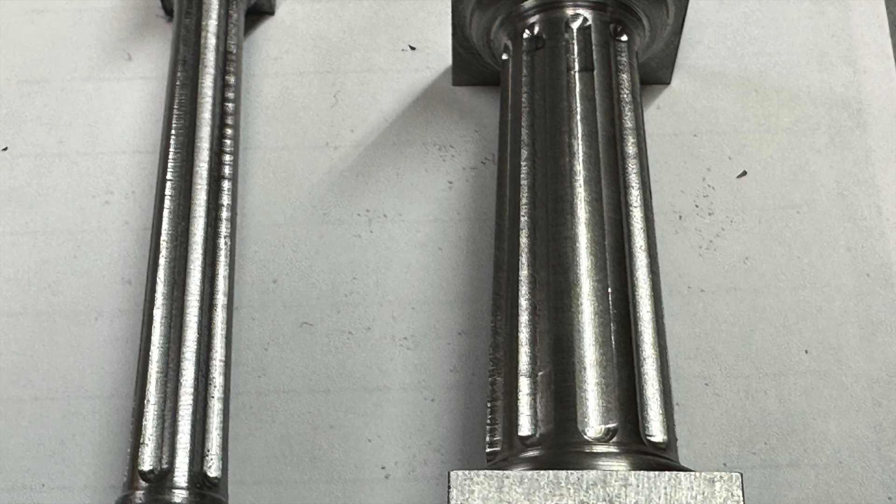This video is going to be about putting flutes in tapered columns, and most of you have probably already done straight flutes in a straight column, and that's not much of a problem. But when you get to a tapered column, it is a problem, because what happens is, as you taper the column, you have to get them narrower up here than they are down here.

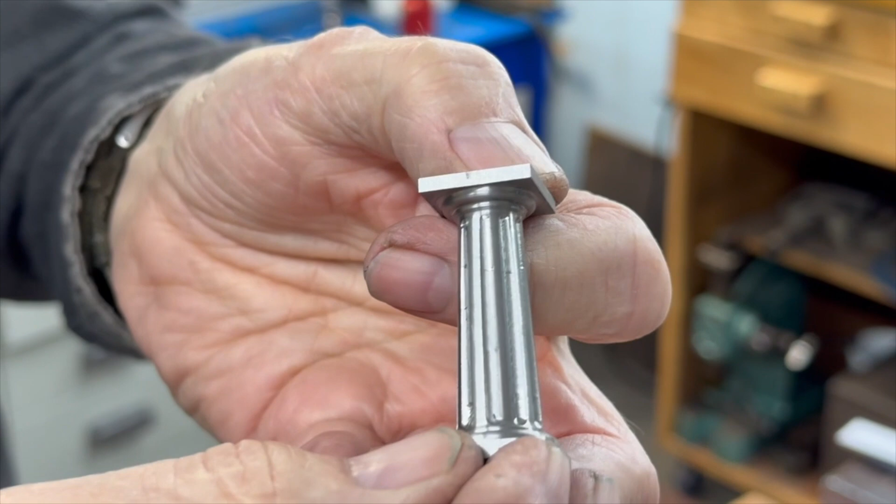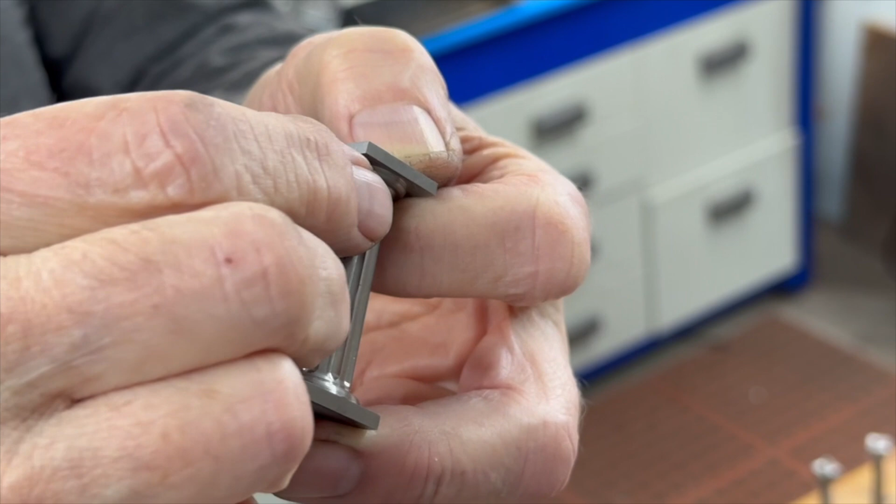And as you can see, the flute itself is tapered. So how you do that is by depth. The deeper you go in, the wider it gets. So as you come up to the top, the tool has to be out a little bit. So you're only going in a depth on this one. I think it was 14 thousandths at the top, but it was 24 thousandths at the bottom. There was 10 thousandths difference.

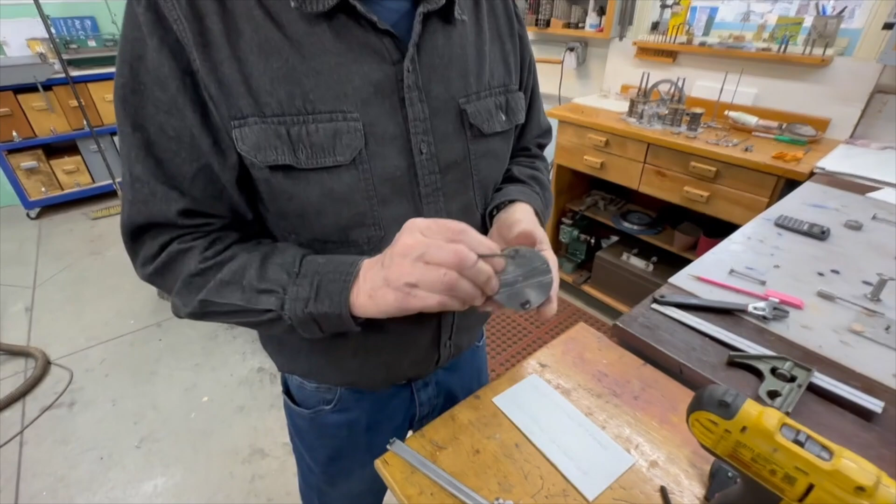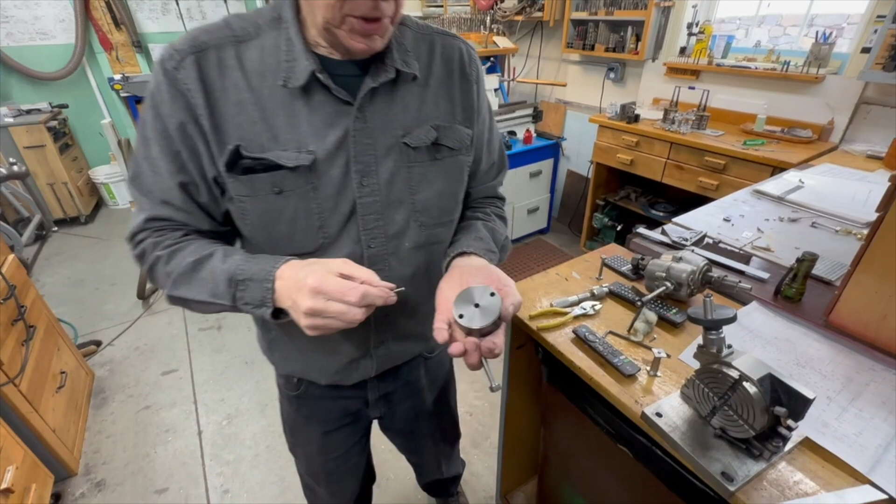And this one here, I made a special jig for. This jig is nothing but a slug of metal, and I put a slot down the middle exactly in the center. And you see there's a wider slot. That was for the other column. Now the narrower slot is for this column, and it's exactly centered. And this hole is exactly centered. All I did was counterbore this so I could put an Allen screw in here and tap the bottom of these columns.

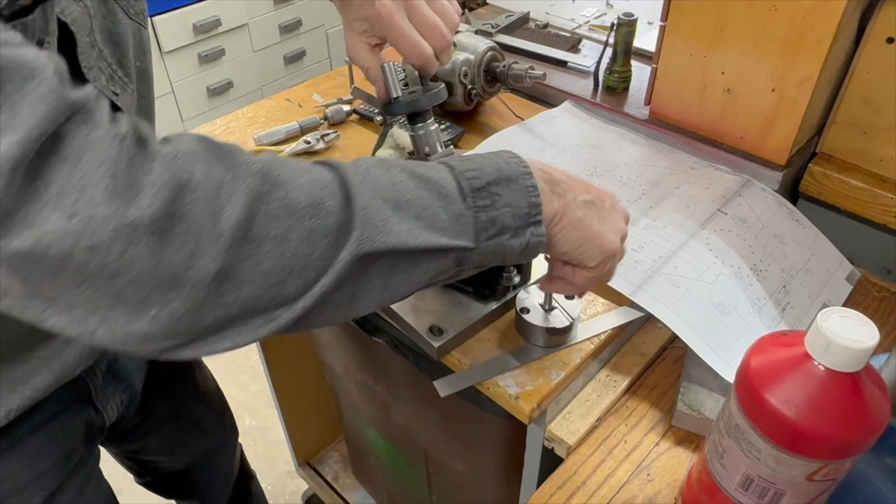And if I screw that in there, it's dead center in both directions. And there it is, solid in that. And now I have a pin in my 4-inch rotary table here. And that centers that jig onto the table. This just goes on there like that, and that puts it right dead center. And we'll put the Allen screws in there.

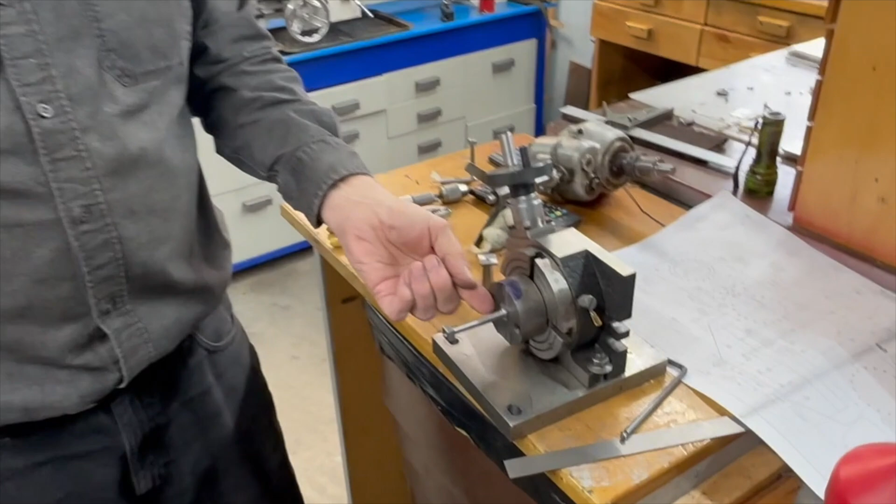Now I've already determined that I want 6 flutes in this, and the way I did it was take a magic marker and put a straight edge here so I could draw a line on it and rotate it and say, well, I can fit 6 of them in there. And this one, I think I ended up with 10. But it's sort of a trial and error thing. You have to figure it out. You can measure around there and do a lot of mathematics on how wide this is going to be and how wide that's going to be. But what you want to shoot for is the center part that isn't milled should be fairly straight.

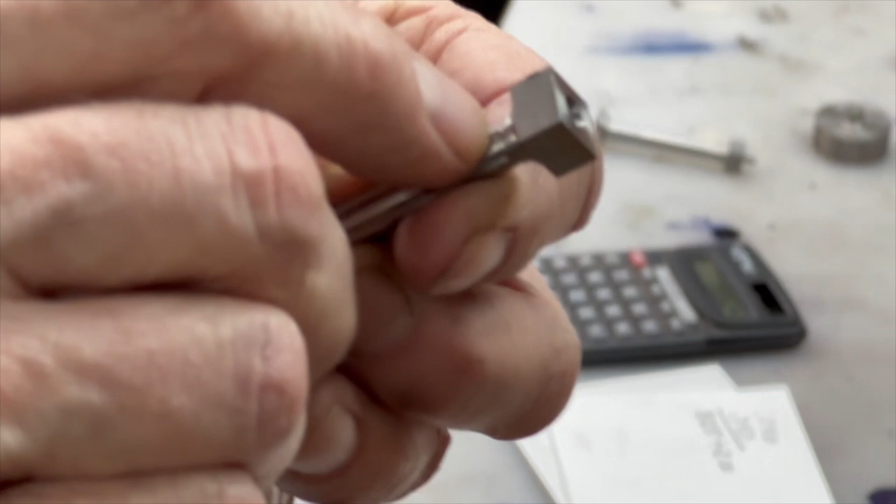Now we're going to show you how to determine the width of the flutes at each end. And we're going to start off by measuring the diameter of the top, which is 240 thousandths. Then I'm going to measure the other end and write that down, which is 315 thousandths. So what I've determined is it's basically 62 thousandths for the flute and 62 thousandths for the space in between, all the way around here.

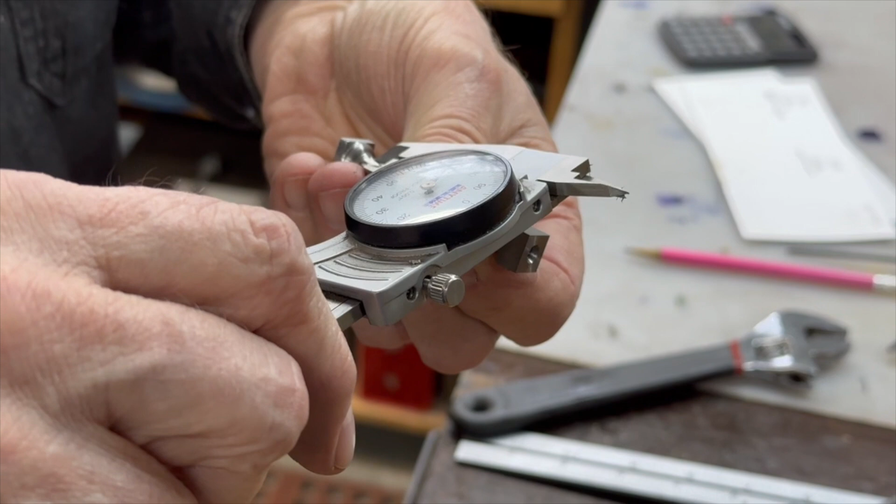Now, we're not going to worry about the bottom yet. The first place what's going to show if you make a mistake is the top. If you get them too wide or too narrow or something, it'll really show up. It doesn't show up so much at the bottom, but the thing you're shooting for is an absolutely straight line here, visually. And visually it's pretty hard to see a 10 thousandths difference, but let's just measure this one and see what it is. That's about 8 thousandths over down there. So there's actually an 8 thousandths difference, but you can't see it. And that's very acceptable. That's a good looking fluting job.

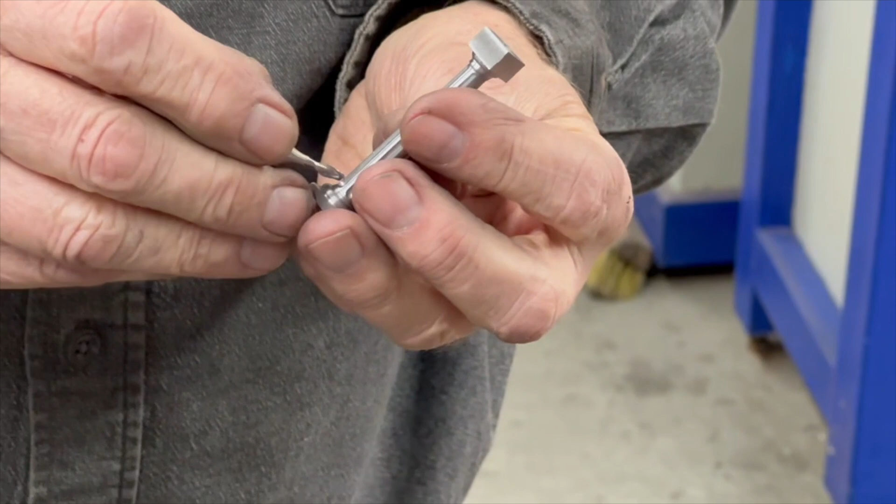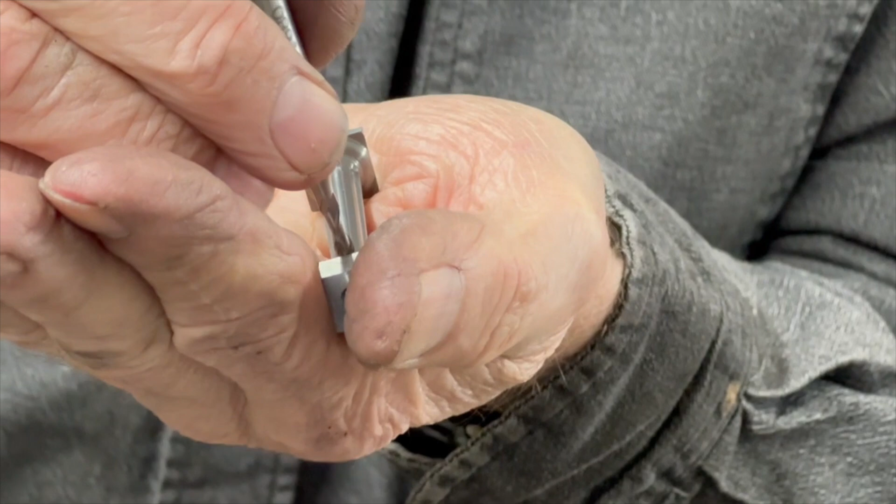I've determined on these flutes that I want a 1/8 inch ball end mill. And what you want is the base to be just about the width of the end mill, because the deeper you go in on this, of course, the wider the flute becomes. So if you have the base so that it's the same width as the end mill, you take away one problem, because as you go in deeper, it doesn't change the width. As you come up here, it's going to change the width dramatically, because you're only using the tip of the end mill. So if you go 10 thousandths deeper, it's going to make it a lot wider.

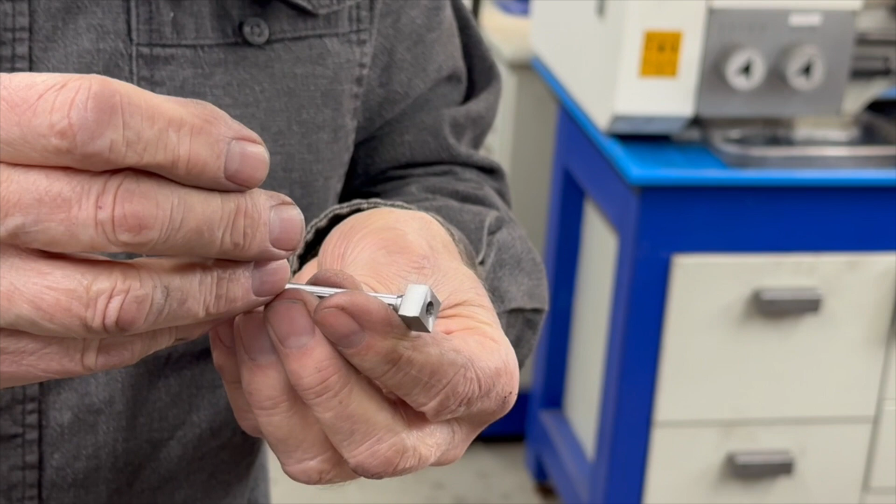So that's what you have to be careful of, that you set that up. And I always make an extra one of these, which this is the extra one, to make the mistakes on so I can check out how everything works out. To determine where you start, you always start at the top, because if you make a mistake at the top, it will show up more than it does at the bottom.

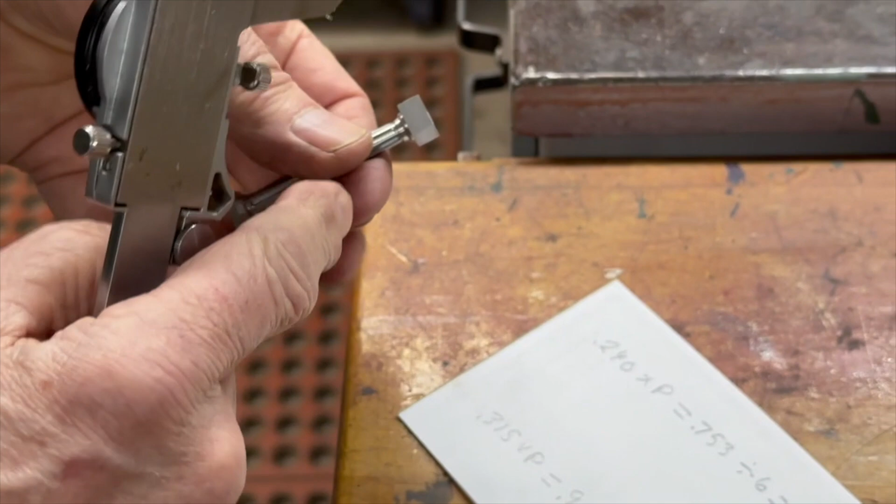So I always work from the top down. Now, take the diameter of the top, which is 240. I'll put this piece of paper over here so you can see. That's the diameter of the top, 240, and that's the diameter of the bottom. And that times pi gives me the circumference, which is 753 all the way around.

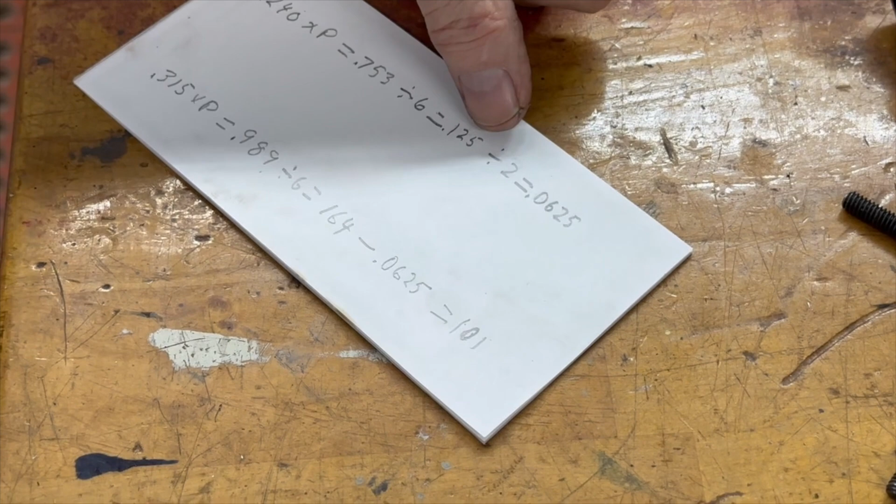And I'm going to divide that by 6, which gives me roughly 125 thousandths, okay? And then you divide 125 by 2, and that gives you 62 thousandths. So basically, what you have is a 62 thousandths flute and a 62 thousandths space in between.

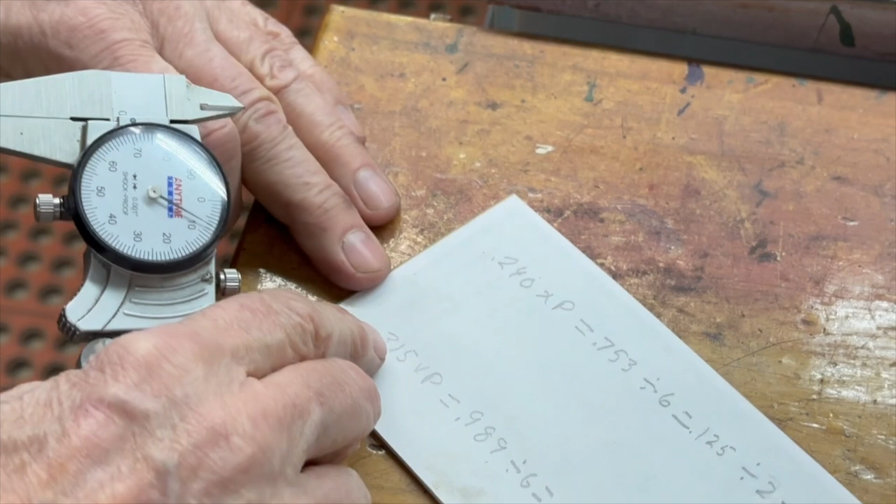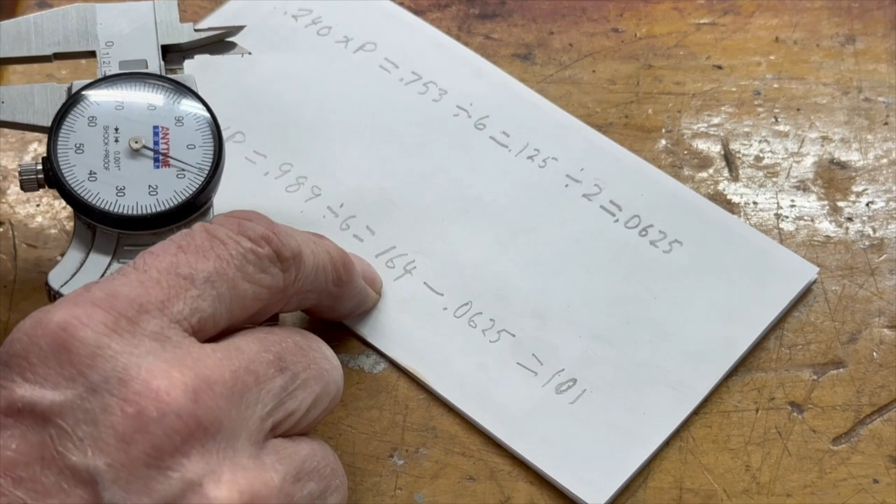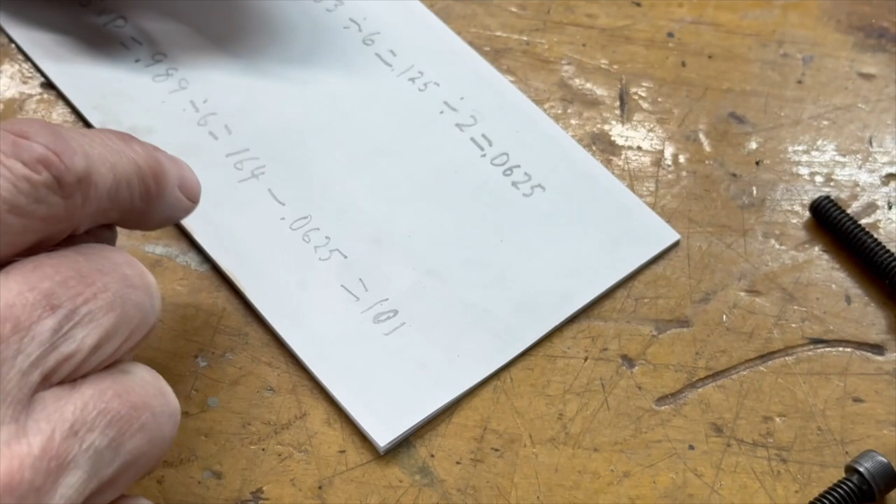Now we're going to go down to the bottom. We go 315 for the diameter times pi equals 989. You divide that by 6 and you come up with 164. Now what you do is you subtract this number from that, because you want the space between the flutes to be the same and the flute to be wider. So you subtract that number from this number and you end up with 101 thousandths.

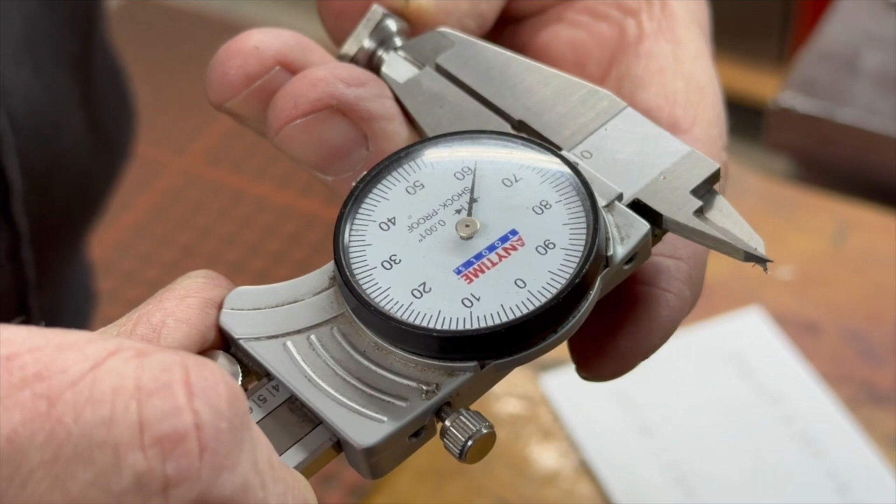And if you measure this here, it's pretty hard, but there's the width between the flutes, and there's the flute right there, as close as I can measure. Oh, boy, it's pretty close on. So that seems to work out right. So that would be the way you would do the math. Now we're going to do the setup so you can do this practically on the part.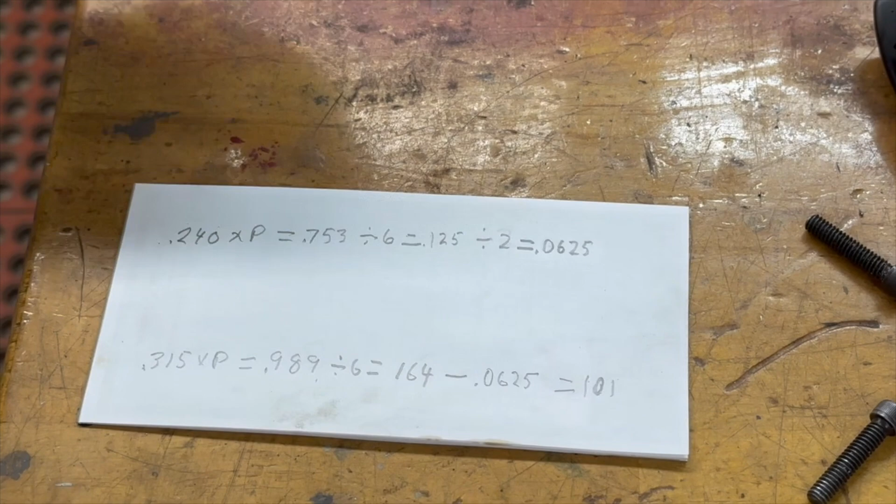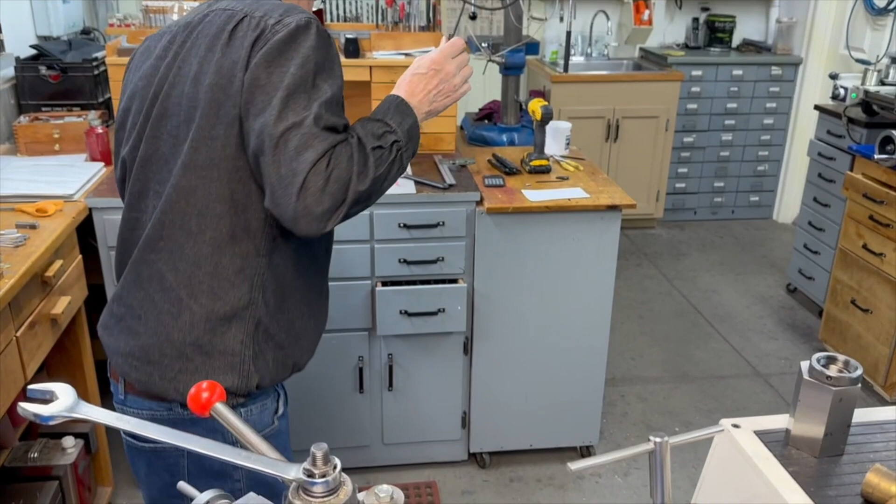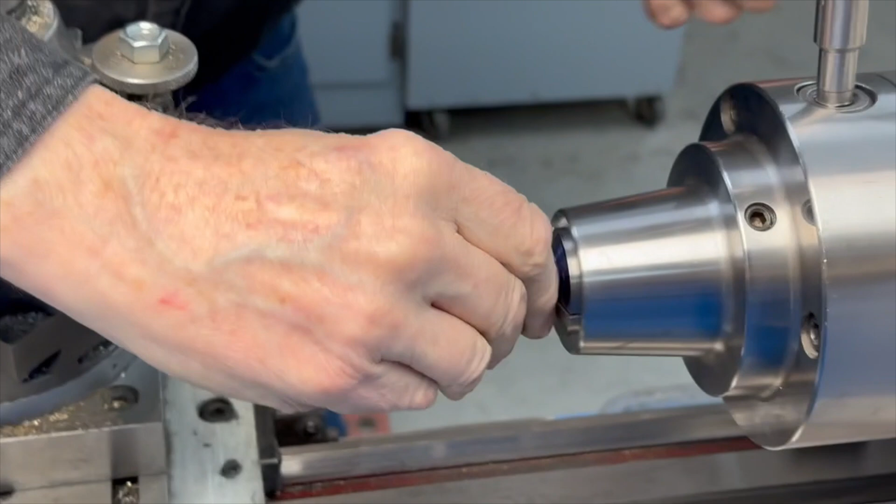So just as an instructional part of this, I'll show you how you can determine the distance between them and how deep they are without going through a lot of the mathematics. What I've got is a piece of 5/16 steel, and the bottom of this taper is 5/16. It just happened to work out that I had made this 5/16, so I don't have to turn this end. But I'm going to turn this other end down to this diameter. And if you had to do both of them, you would. But it just happened it was 5/16.

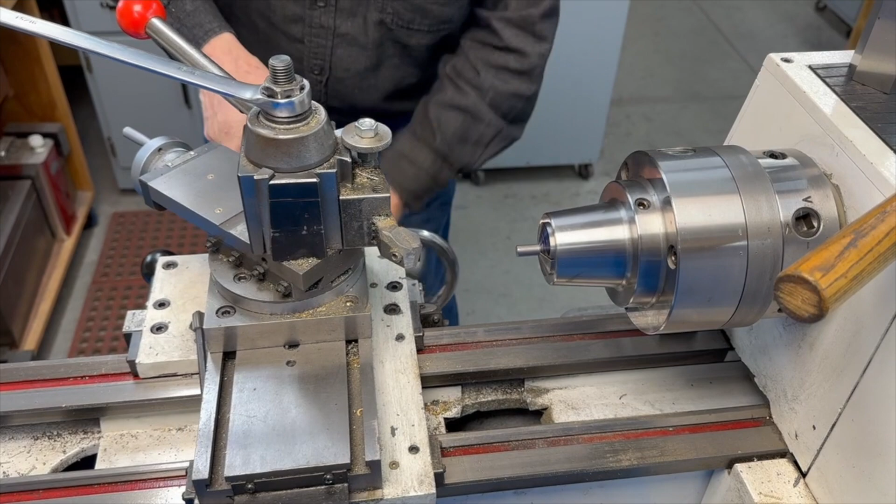So that was 240, which is 10 under a quarter inch. So I'm going to make that 240. And now we have the diameter of the top of the column, and the other end is the diameter of the bottom of the column. Instead of using the rotary table, I'm just going to use this collet block because it's 6-sided and I can rotate it just the right amount without putting the chuck onto the rotary table, and save a little time.

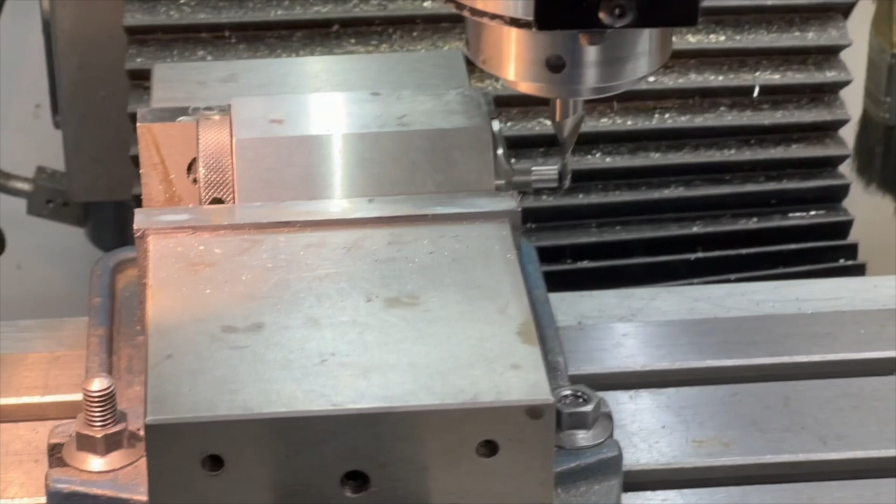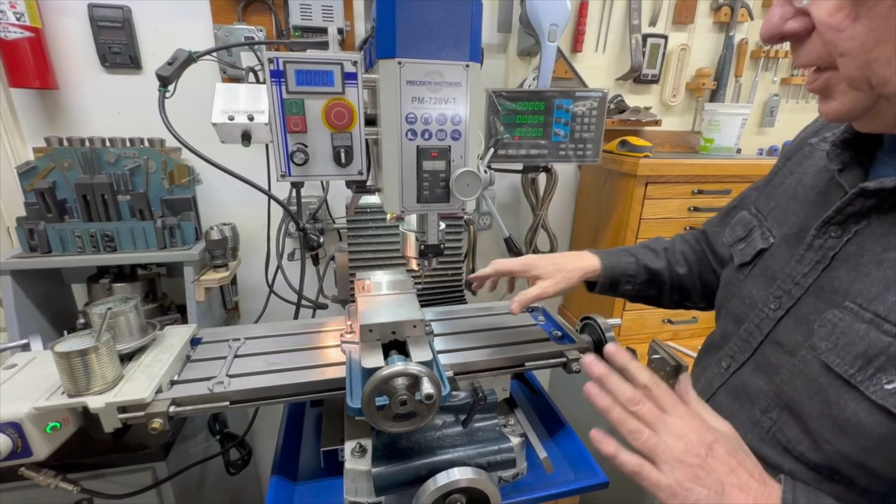I'm just eyeballing the center of this because it's just an experiment. We'll see. So I'm going to come down and touch this with it running so I can get a mark in it. That's just marking it. So I'm going to zero this, lock the table. I'm going to come down 5 thousandths on it.

Now I've done it 5 thousandths deep. I can take this out of here because of the way it's set up, and I can measure that. And that's obviously too narrow because I know it's 10 thousandths, but I'll try to measure it. It's about 40 thousandths, I think. So now I'll put it in and come down 10.

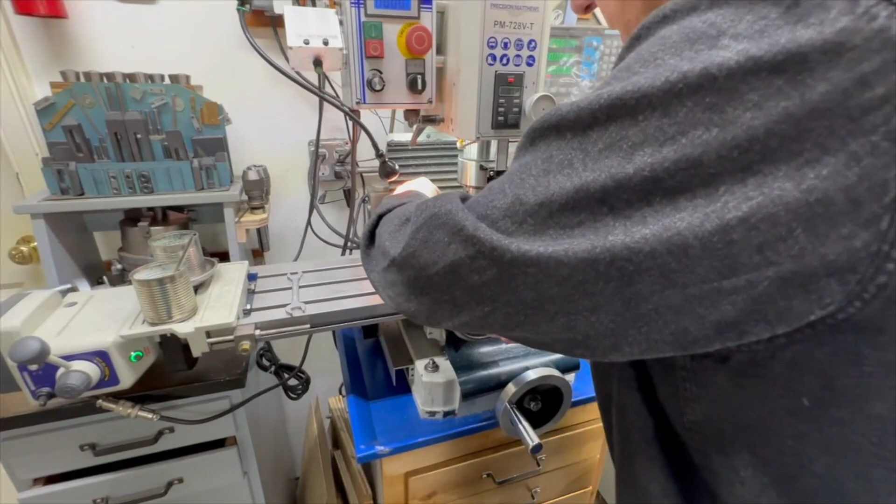Now, the reason I use this collet block is I can put that right back in there, and I can come down, let's go down to 10. And I'll put 6 flutes in it, and then I'll see if it looks satisfactory.

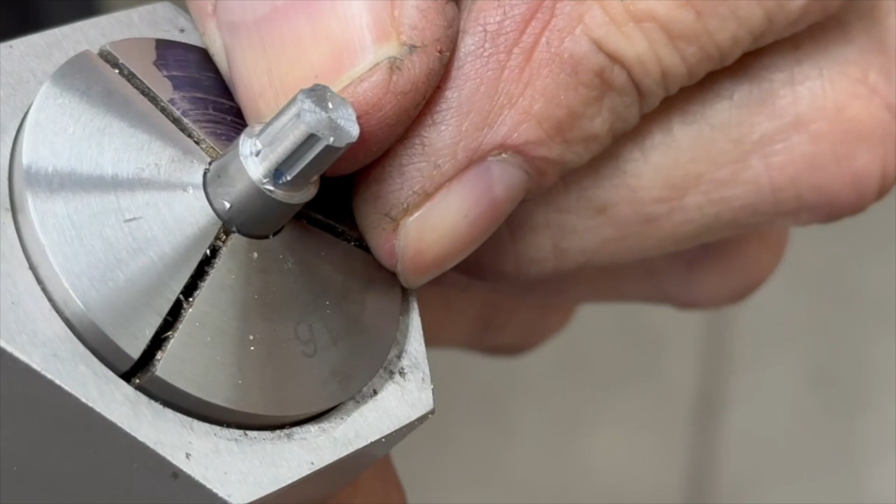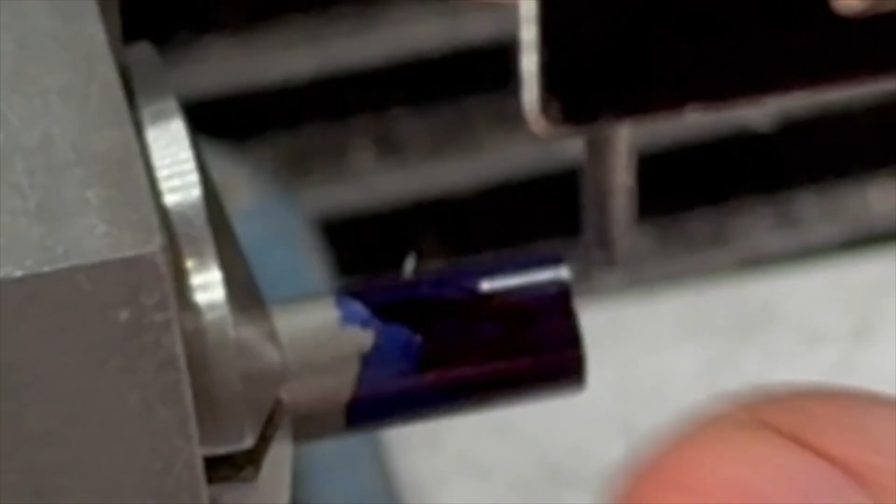Okay, that's the way the top would look at 10 thousandths deep with the same diameter as the top of the flute. But what I'm going to do now is turn this around, and I'm going to go 20 thousandths deep on the other end and see what it looks like. You see the mark that it made there, so I'm just touching it. So now I'm going to come down 20 thousandths, and I'm going to go all the way around 20 thousandths deep.

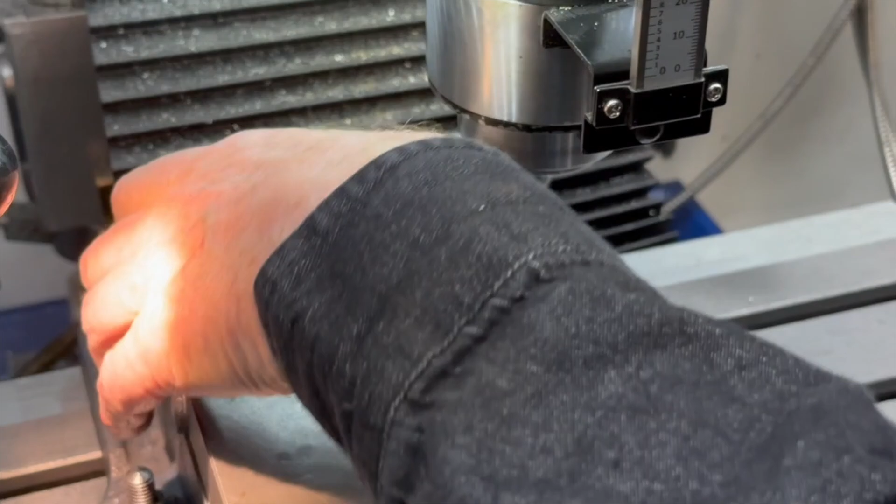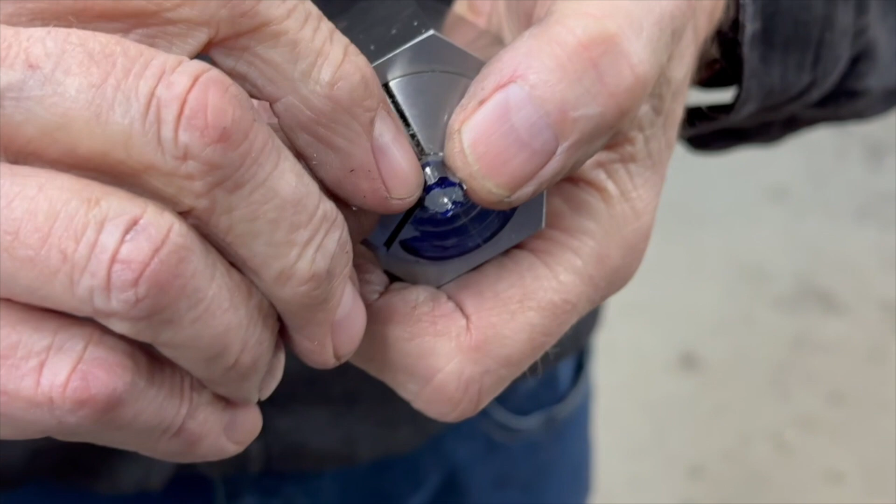There you have what it'll look like at the bottom. Now what I'm going to do is measure this. This width here should be the same top and bottom, and you've got it right. So that proves that all the math was right and everything was working pretty good.

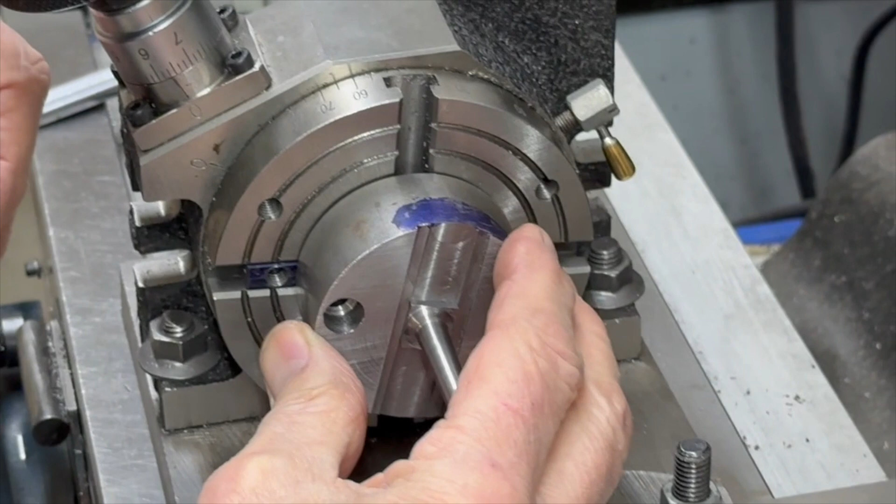And to hold that on, and this is a centering pin. So that's dead center, hopefully. I've got to get some bolts for the T-nuts. Okay, so that's all set up all the way around.

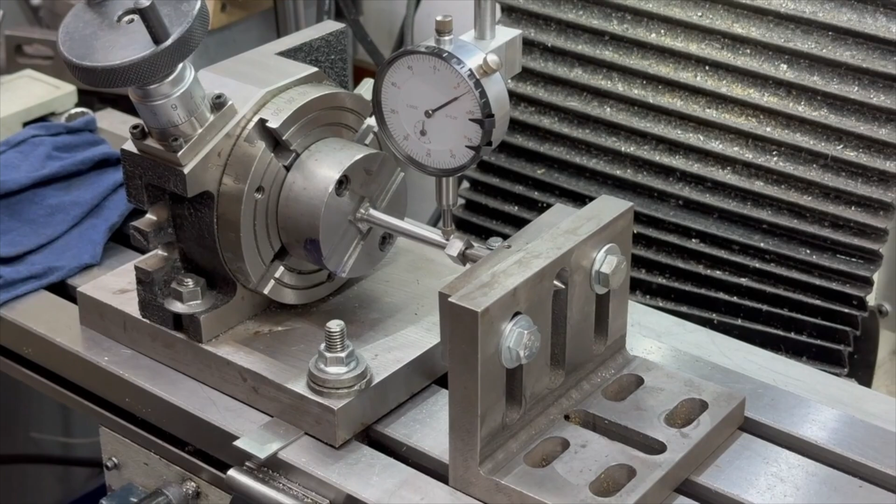And I'm going to show you another thing to do that will take out any mistakes. But first thing, you want to get it solid and as close to centered as you can. Bolt this down. I'm just going to snug this up just a little bit. And then I'm going to tap it in to make sure it's tight.

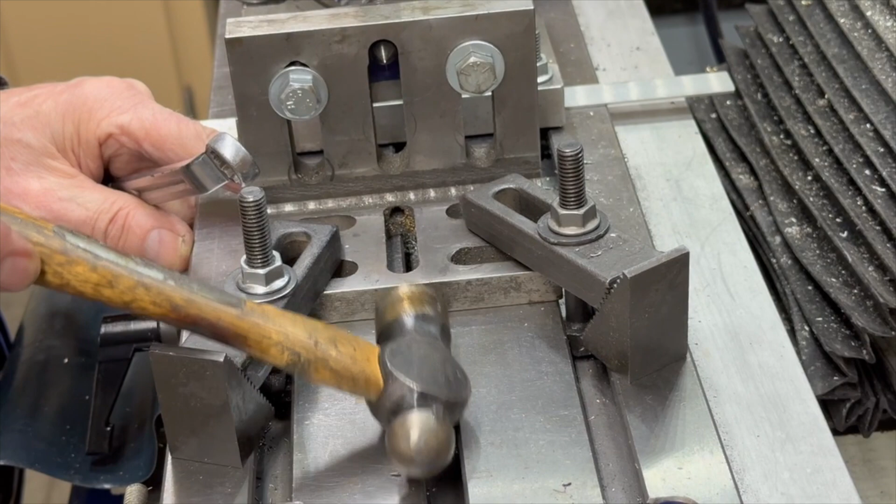Now, if I run this around, it should be pretty good. Whoop, it's not moving at all. It's exactly right. See that? It's within a couple of thousandths. So that's good. That's a good setup.

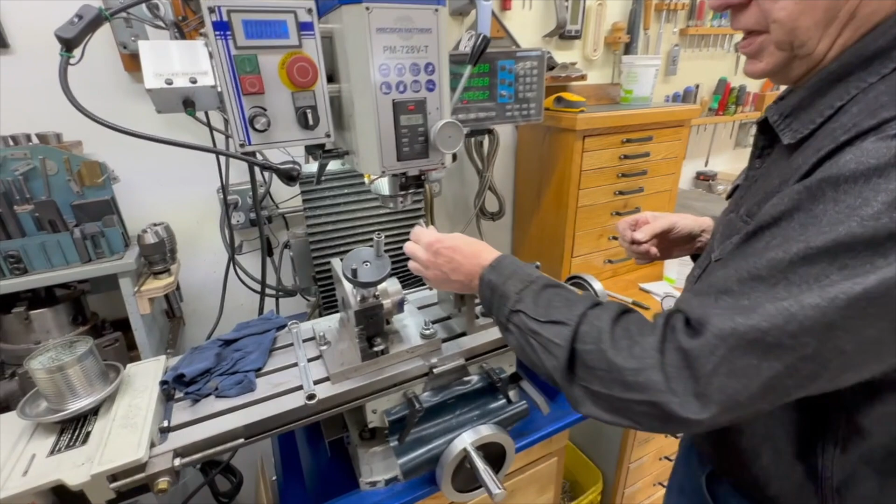All we're going to do is put in the 1/8 ball end mill and run a test to see how it worked out with all our math. What I'm going to do is turn the machine on, and I'm just going to barely mark that. And then I'm going to run it across and see how deep it is on the other end. And if everything works out right, I just go 10 thousandths deeper and come back, and I've got it 10 thousandths deep on this end and full depth on that end.

So now I want to set up the stop for that end. Now I'm going to come down 10 thousandths, and then I'm going to bring it back across. So there it is, 10 thousandths at this end, and about 25 thousandths deep on the other end.

I'm going to rotate this to 60 degrees. Stop. So I got to set this end stop up too, so they all come out the same. Marking it now. So now I'm going to crank it all the way down. You can see the width of the part that isn't cut is basically a straight line, and that's what you're shooting for. We'll crank it around to 120.

240. Okay. Yeah. 300.

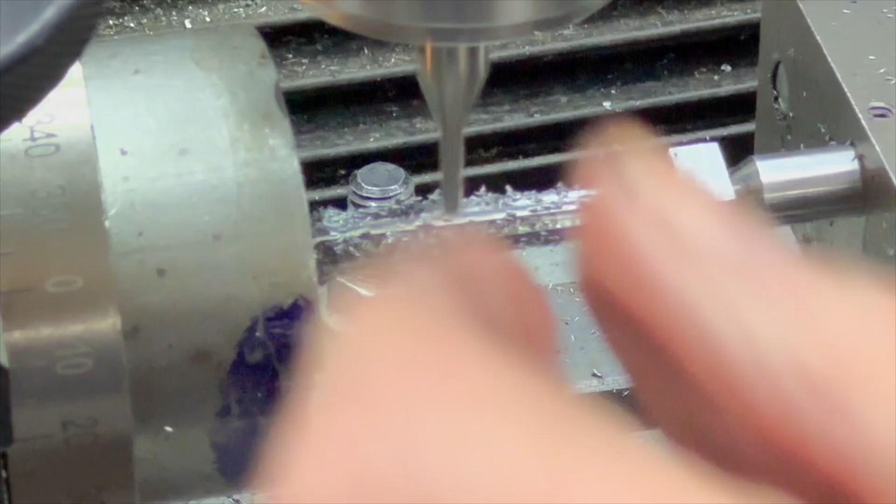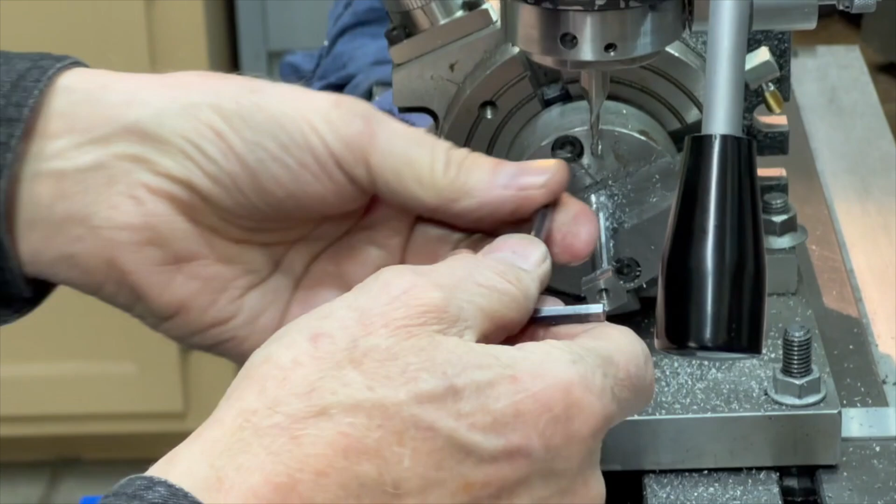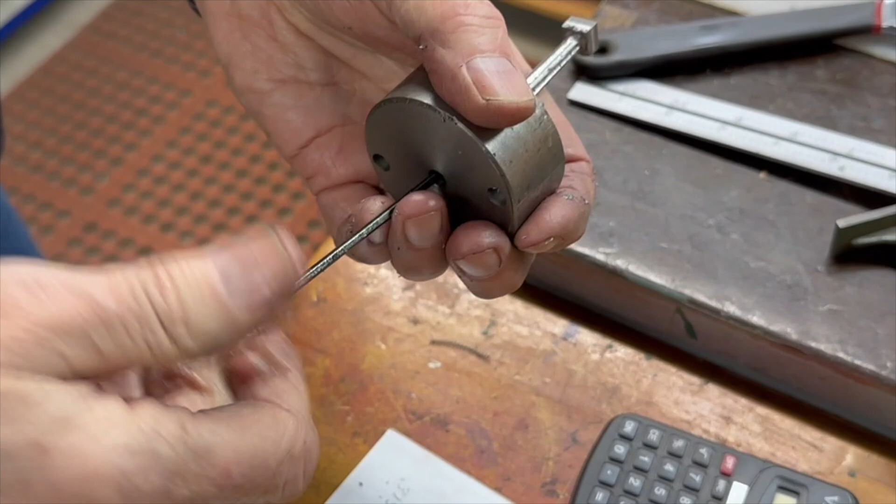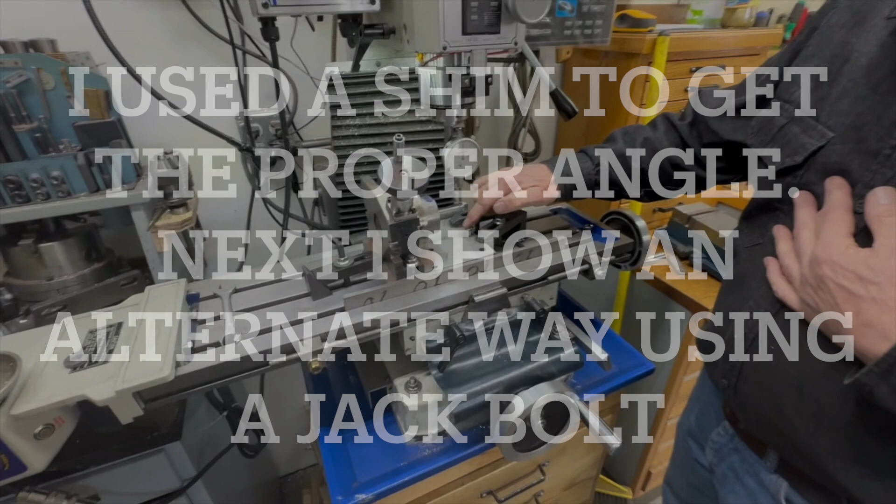Now we'll take it out of there and see if it's usable. Looks pretty good to me. We'll clean that off and we'll show you. What I did is I put a jack bolt in here so I can jack it up and down. And I know that if I turn this, it moves it 10 thousandths per flat.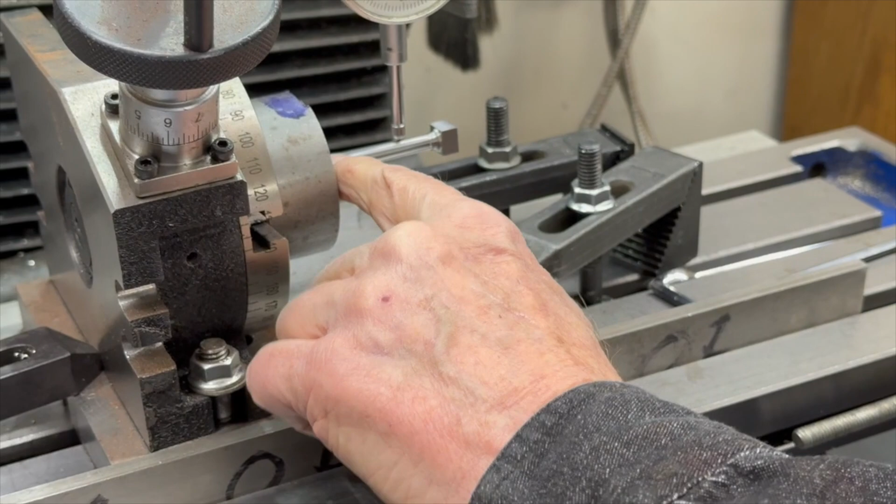But what you have to do is adjust that so you have a 10 thousandths difference, a 12 thousandths difference actually, to the other end. But as you can see, it's going deeper and deeper. And it's just about 12 is what I'm looking for. And that's almost exactly 12 thousandths. So it'll come out 22 thousandths deeper on this end, which is very acceptable. I had figured it at 25, but I later determined that it didn't have to be 25; 23, 22 would be fine. And so that's what I did.

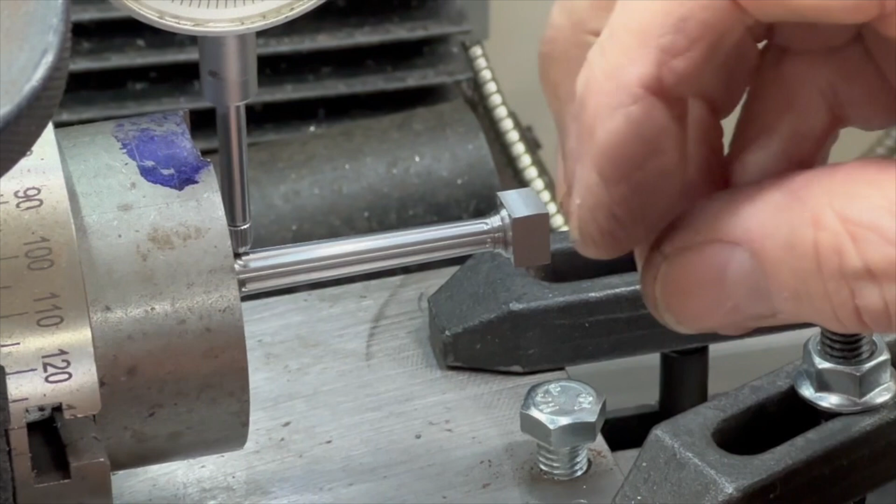So if I crank it back and forth, as you can see, it's just going in deeper, 10 thousandths. And when I make my cut, I'll start at 0 here, just touching, and I'll cut down here and it'll be 10 thousandths deep here. I mean 12 thousandths deep here. What I'll do is crank down another 10 thousandths and come back this way, and it'll be 10 thousandths here

and 22 thousandths there. But what you have to do is determine, by the method that I showed you with the little scrap of metal, how deep they are, then you determine how much difference you want from there to there. And that'll give you the proper depth for your flutes. As you can see, that's just almost exactly 12 thousandths to that end.

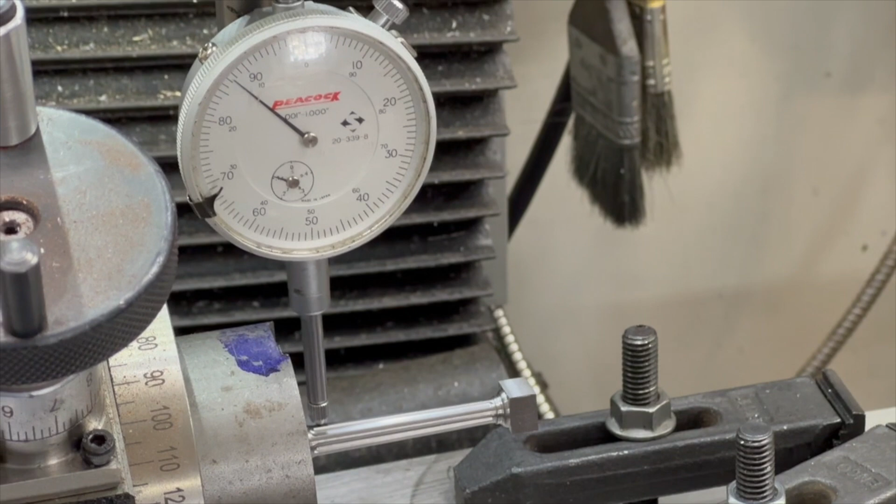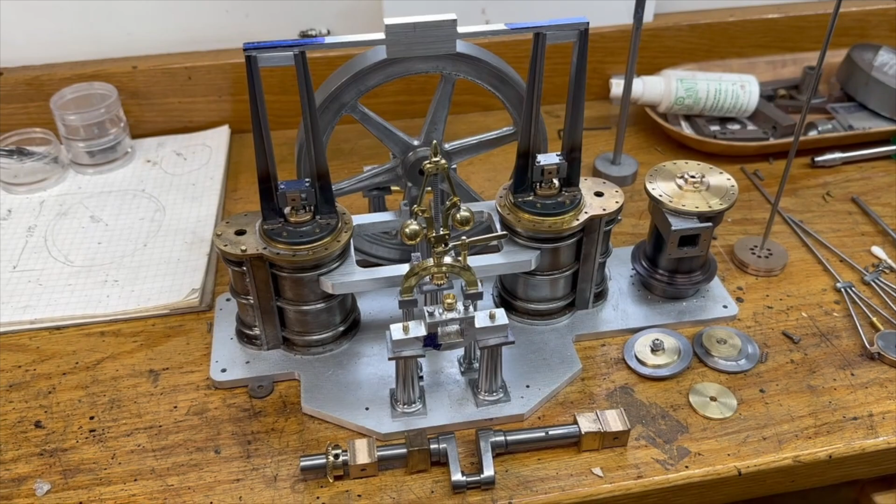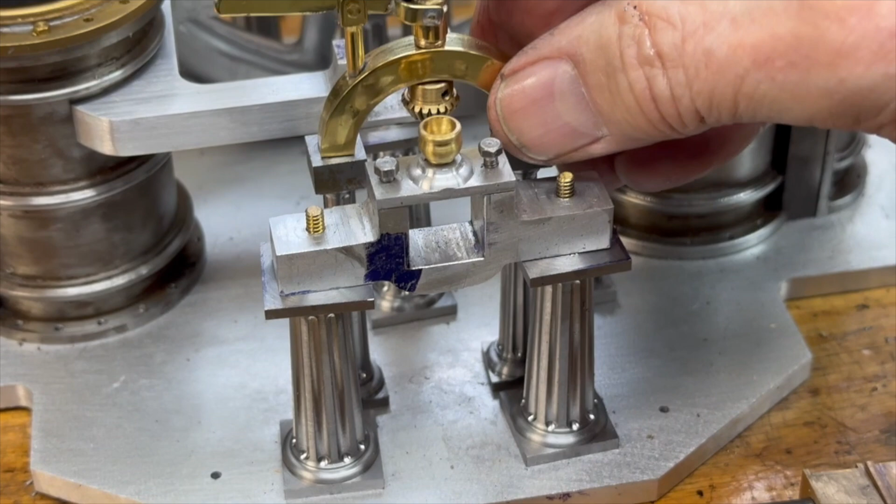So this is the engine that I'm working on, and this is what the fluted columns are for. And because I'm scaling it down 25%, I have to change everything, and none of the dimensions work on the other one. But as you can see, those make nice columns. And this holds up the governor, which goes in behind here, bolts in. And we'll show this from time to time as I get it more finished, but this is just what I have so far.